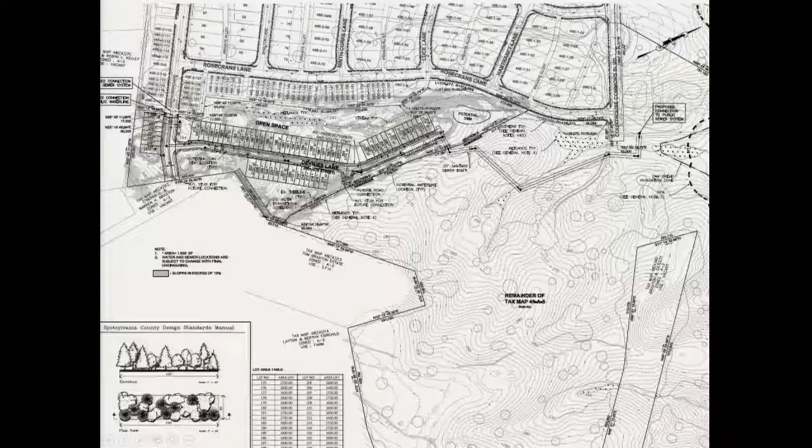There are public and private roads within the development now, but the public road will extend south here, and the private road here will be known as DeVries Lane to serve these 60 single-family attached lots.

The 60-lot subdivision is a result of a rezoning, a mixed-use rezoning that is a multiple-phase development. There's approximately 86 acres which will remain to be developed at a later date, and you will see those preliminary plats in the future as they come across.

These lots will be served by public water and sewer. The preliminary plat has been reviewed and approved by the Technical Review Committee, and staff is recommending approval and asks the Planning Commission to adopt the approval resolution in your packet.

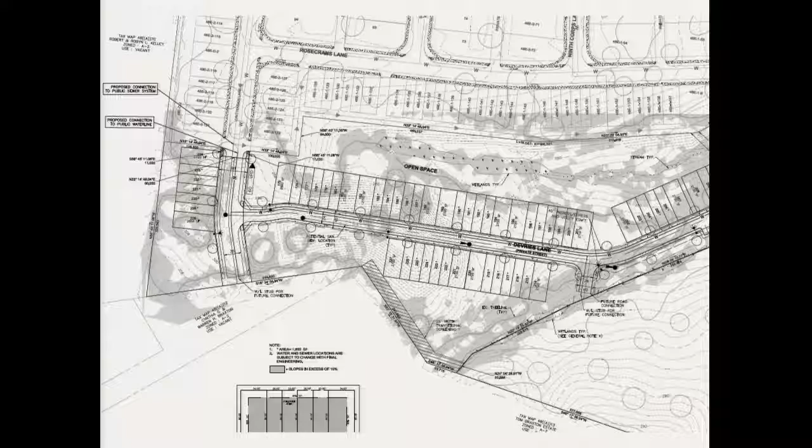Any questions or comments? I'll take a motion to approve. Second. All those in favor say aye. Aye. Opposed? Abstentions? Abstain. Very well. Moving on to the next item, public hearing, rezoning R17-0012.

This is a request to rezone approximately 6.5 acres from residential 1 to residential 8 with proffers to allow for 45 age-restricted single-family attached units to be known as the Villas at Salem Church. The property is located at 5715 Ross Drive and lies on the north side of Ross Drive, about 500 feet east of Salem Church Road. The by-right development potential with the current zoning for this property is 4 single-family detached lots. Staff is recommending approval of the request with the proffers submitted by the applicant.

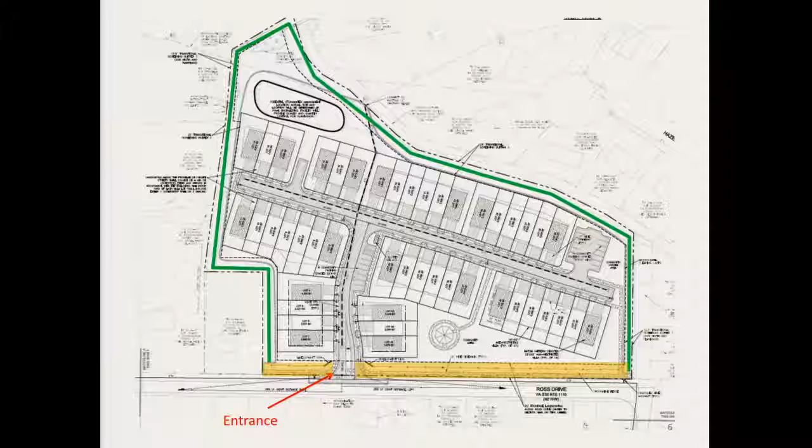Continue, please, Kim. The applicant provided a fiscal impact analysis which asserts that the Villas at Salem Church will have an average sales price of $250,000 and generate revenue to the county in the amount of $121,730 annually at build-out.

Staff conducted a separate analysis using the county's model. We used an assumed assessed value of $226,250, based on the River Crossing Villas at River Road and Bragg Road next to Spring Arbor Memory Care, a comparable product in the county. Utilizing their average assessed value, our model projected that the project would generate $65,540 annually at build-out.

It's not uncommon for these numbers to be different. Our model is admittedly a conservative model, but I think it's important to note that they're both trending positively.

The applicant has provided proffers for the Planning Commission's consideration. The first being development in conformance with the generalized development plan that we just reviewed. This is an on-site proffer and consistent with the state code.

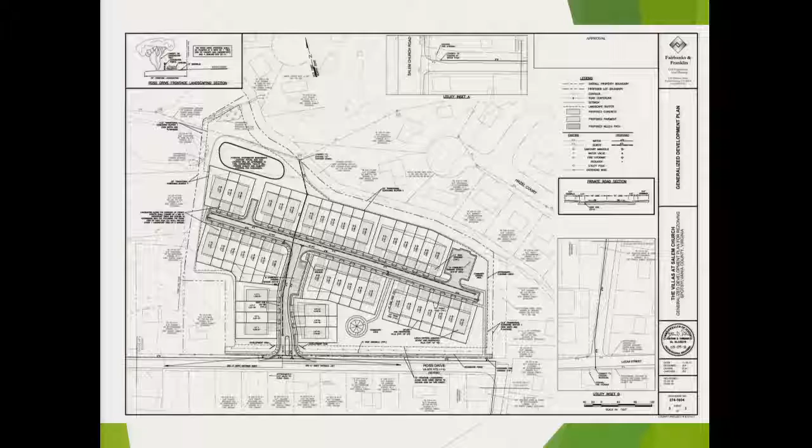The next slide is a little easier to see and shows what I was just talking about. To the north, there's a tree line area. That hatched line running north behind our project is an easement area that's been undisturbed for many years; we're not disturbing that. You'll see we're also providing a 25-foot wide transitional buffer and replanting that area, as well as a transitional buffer around the property to the south, east, and north.

You'll see open community areas to the south, with a little gazebo and other features, and additional community areas to the northeast. The sidewalks will all be connected, creating walking opportunities for residents. This is intended to be somewhat of a private residential community for those who will eventually live there.

For purposes of access, at the community meeting there was concern about traffic coming directly out and impacting the property to our immediate south. So we created this island that extends into the project, much of which will be landscaped up front. There's also a little jog that pushes vehicles to the west, which pushes the impact of vehicles leaving at night away from the immediate south, so that homes to the south would not be impacted.

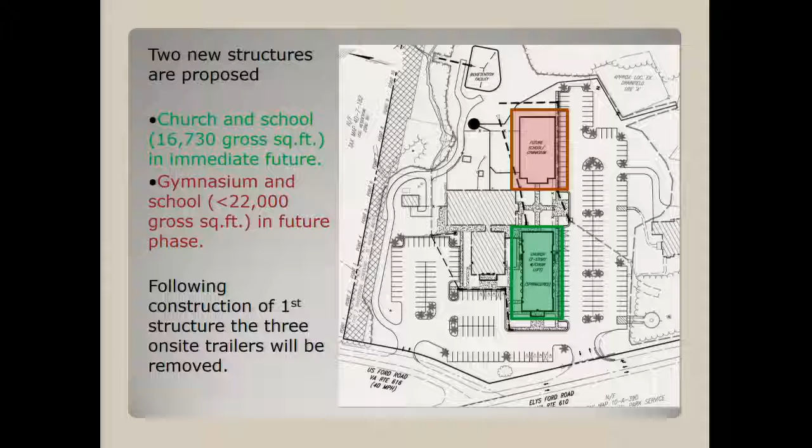Access to the property is provided by both Ely's Ford Road and US Ford Road. Ely's Ford Road is estimated to move approximately 5,000 vehicles a day, and US Ford Road approximately 800. Trip generation data estimates 460 and 153 vehicles per day expected on Sundays at the Ely's Ford and US Ford entrances respectively. During the weekday, the private school is estimated to generate approximately 420 and 140 vehicles per day onto the same roadways, respectively.

Additional parking is also proposed on this GDP, which will be required as the property develops. The applicant is also proposing a new dry pond, labeled a bioretention facility, which is necessary to treat water runoff resulting from these new impervious areas.

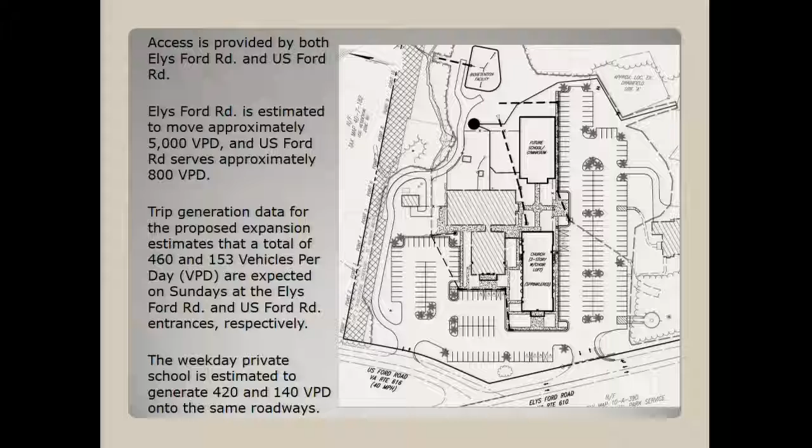Patrick. Yes, sir. Dry pond — could you explain that? Explain that again. Sure.

Water is routed to the bioretention facility, the dry pond. There's wet ponds and dry ponds. The dry ponds are not expected to take on as much water as the wet ones. This particular pond, as I spoke with the applicant about previously, should not have any more than a foot or two of water in it, and is supposed to drain out in about 2 days. If I'm incorrect about anything, please correct me in the presentation. Thank you. Thank you.

The applicant is proposing a transitional screen 2 along the north and eastern property lines. That was originally proposed to be a transitional screen 1. We'll touch on that more in a minute. The code requires a transitional screen 1 when a place of worship abuts a single-family residence, so what they're proposing now is above that.

The buffer along the eastern property line, shown in beige, is proposed to be basically a 35-foot tree preservation area, for lack of a better term. At present, no additional plantings are proposed there, but 35 feet will be preserved as it is today. The buffer shown in blue outline will be enhanced with additional plantings, at a minimum 35 large evergreens, 70 medium evergreens, and 8 large deciduous trees.

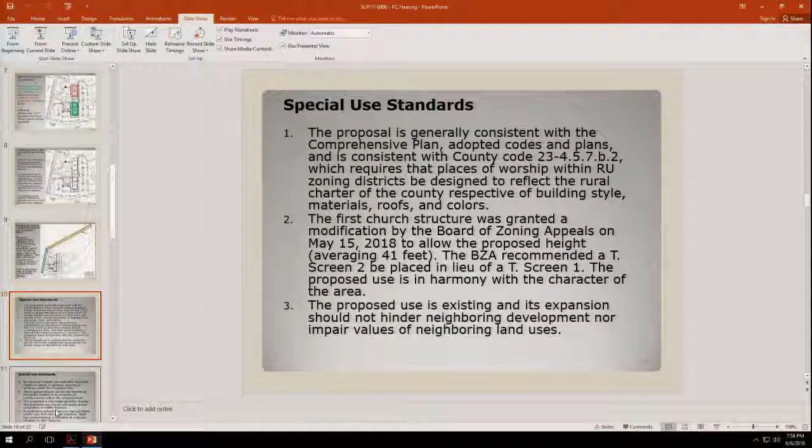There are 8 standards of review analyzed in a special use application. They're detailed in your report, but I'll briefly summarize them. First, the proposal is in general compliance with the comprehensive plan and other plans and codes. The proposal is generally consistent with surrounding uses, coverage, density, and character, although, as mentioned, there was that modification for the height. The proposed use is existing, and its expansion should not hinder neighboring development nor property values.

No adverse impacts are expected regarding health or safety. The proposal should not be detrimental to the public welfare or that of neighboring properties. The proposed use has adequate access to facilities, but requires well and septic facilities due to the lack of available county water and sewer services. It's outside of the PDB.

No traffic hazards nor congestion are expected from the proposal. Lastly, the property does contain earthworks in the form of cannon emplacements and trench lines. It's believed to be the site of quote-unquote Hooker's Last Line. Staff is recommending a condition to prohibit disturbance within this culturally significant area.

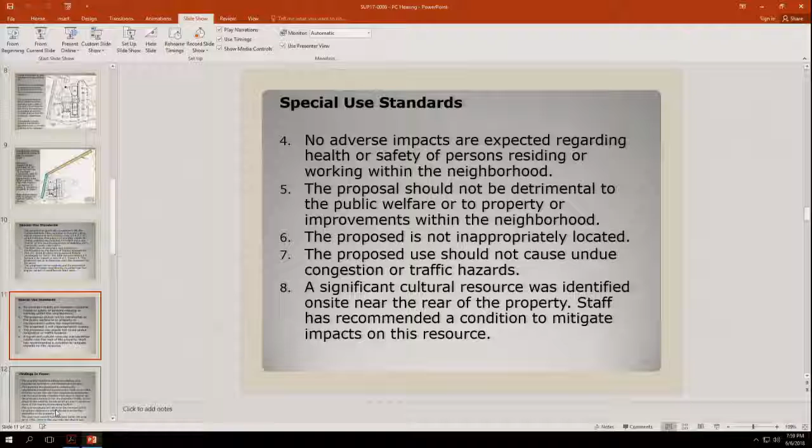Explain that to me, Patrick. Sure, do you have a condition that explains that? That's you'll get to? Correct. Okay, I'll wait for it. All right, Mr. Chairman. Yes, sir.

One question, Patrick. On the height, the 6 foot, that is because of the grade of the property, am I correct? That's right. The front grade of the property is substantially higher than the rear grade. Because we define height using this averaging, it exceeded the maximum height. Thank you.

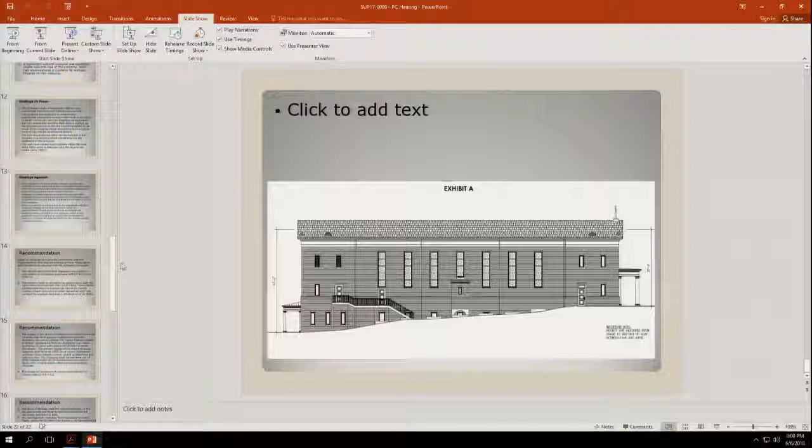Picking back up on the presentation, there are only a few slides left — summary slides and then the final slide. Staff reviewed the case and found the following in favor.

The church has been located on the property since the early 1980s. In 1993, it was expanded to provide private schooling and has since grown with relative harmony in relation to its neighbors. Its expansion will allow new members of the church and provide a better learning environment for the students by relocating them from portable classrooms into permanent space.

The applicant has snugged the access path closer to the south in order to provide the widest buffer area they can on the north buffer, and has proposed to place additional trees in the northern buffer to better screen the land use.

These were the findings against. The applicant's proposal currently includes the development of drain fields in a culturally significant area. Staff's recommended condition is to prohibit this. Secondly, we observed a level of service reduction expected from a B to a C during weekday peak hours on Ely's Ford Road.

It's worth noting that the comprehensive plan recommends that roads like this have a level of service C, so it's still in compliance with that.

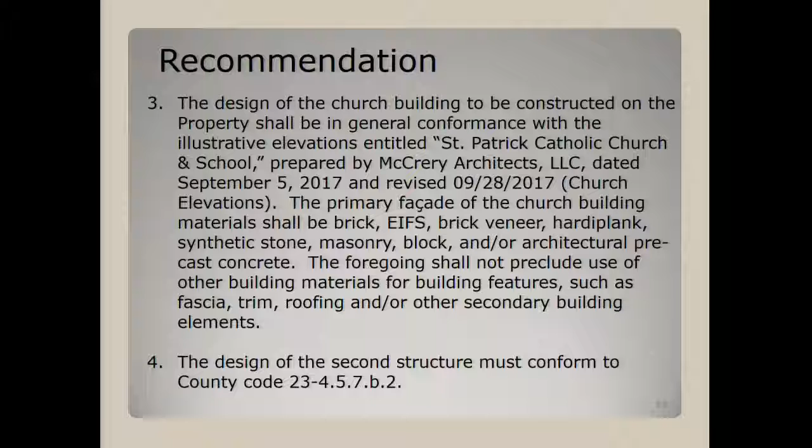Secondly, the property will develop in conformance with the GDP as presented tonight. Thirdly, the design of the first structure will be in accordance with the design elevations in your packet. Also, when the design is complete for the second structure, it still must conform with the county code referenced there, which governs the development of churches in the rural zoning district, intended to make them look like they belong in a rural Spotsylvania setting. It has some material specifications and some color specifications.

The fifth condition, excuse me, this one was worked out with the applicant, that the place of worship will not exceed 608 seats or the occupancy limit set by the fire marshal. Sixth, that the development, including construction of septic fields within the identified boundary of site 44 SP 0638, is prohibited. And seventh, that no temporary parking of vehicles shall occur on Ely's Ford or US Ford Road — it's only a 2-lane road.

With that, I'll stand by for your questions. I know the applicant has a presentation, and thank you for your attention. Well, apologies for the interruptions, Patrick. Any other questions? Mr. Chairman, did you have a slide, Patrick, that showed the existing drain fields that are being used and the reserve drain fields and how they relate property-wise that we can take a look at?

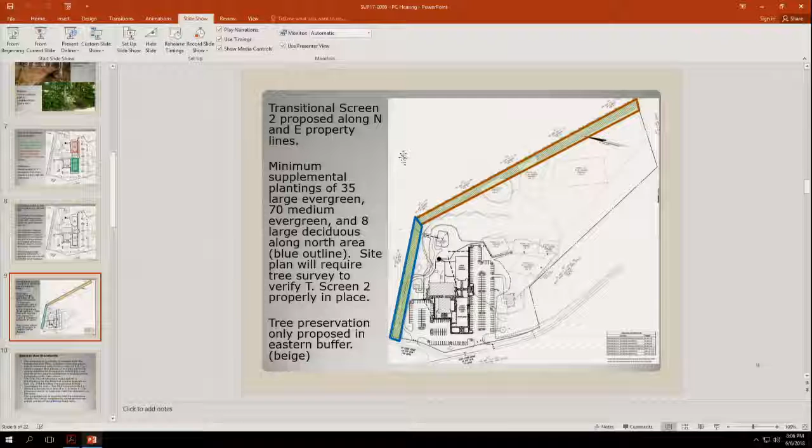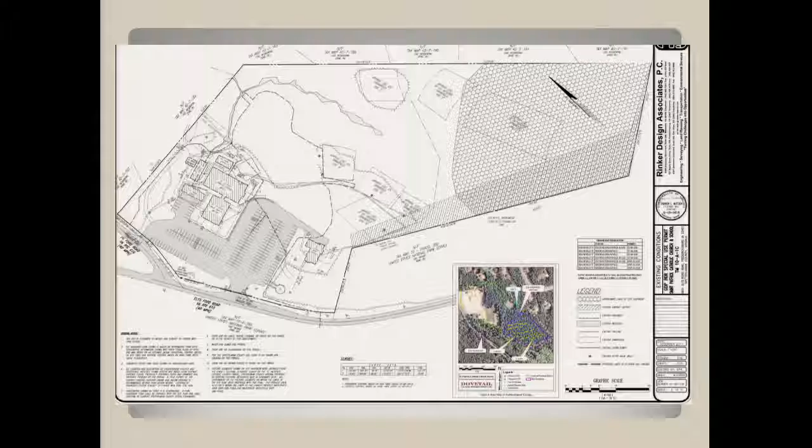This image depicts them fairly well. There is a located drain field that my mouse is on now, called A. There is a B right here. There is a C here and a D here, an E up here, an F, and drain field G, which is the largest.

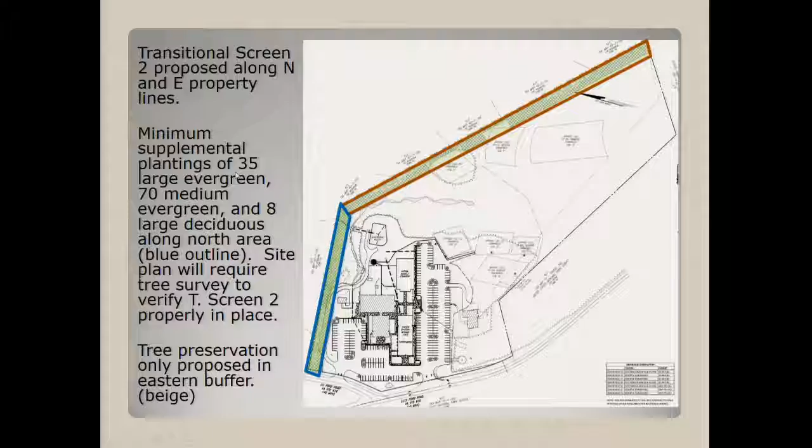And do you know which ones are the primary drain fields and which ones are reserve? I do have that data on the GDP, I'm just going to have to look for it. Or is that in your presentation? Okay. If you can't find it, that's all right. No, I can find it.

Drain field A is existing. Drain field B is reserved. Let me get those in front of you again real fast.

A is an existing drain field in use. B is a reserve drain field, this one. C is a reserve drain field, this one. D is an existing drain field in use, this one. E is an existing drain field in use. F and G are reserves.

Along what would be the south boundary line, the other cross hatching is also a restricted area. What is that? I can't read your plan.

On the south end is a small overlay of a historic overlay district boundary. So does that preclude the use of that?

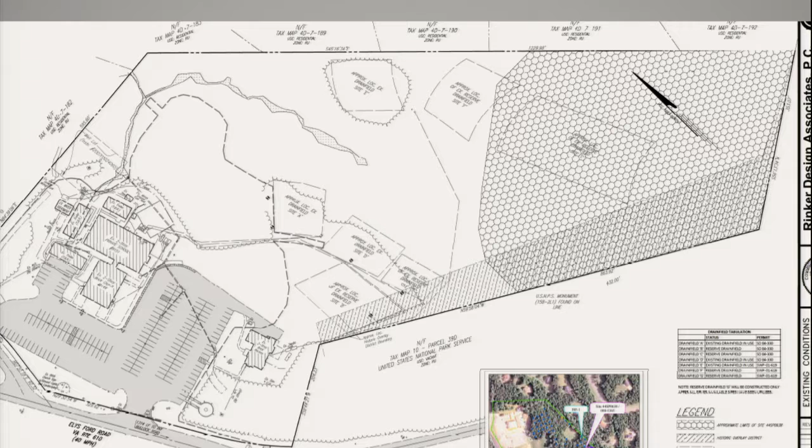So what you're suggesting is drain field G? It's most impacting drain field G, and drain field F would just need to be cut shy a little. Thank you.

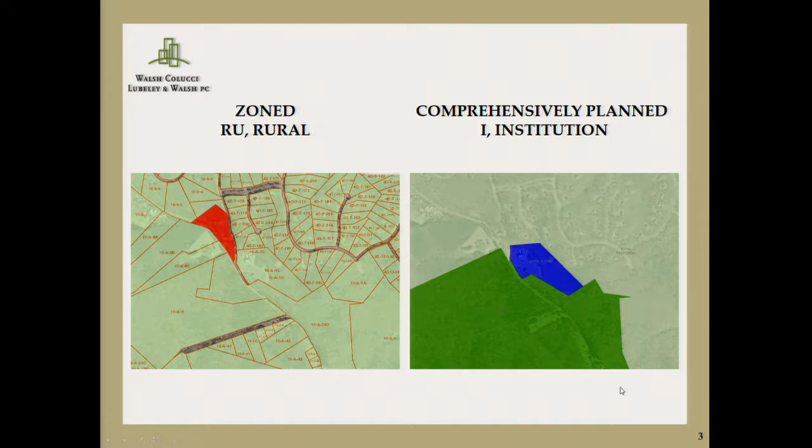The property, as Patrick indicated, is located at 9151 Elys Ford Road and is comprised of approximately 17.81 acres. Of that, the applicant is proposing to develop 3.15 acres for impervious area, which is less than 20% of the entire site. The property is zoned RU Rural and comprehensively planned Institutional. The special use permit is required in the RU district and is compatible with the long range land use plan.

This aerial shows the existing layout of the church. Here is the church, here is the school, and here is the existing rectory on site. The existing school serves children ages pre-K 3 through 8th grade. The middle school children are currently, as Patrick indicated, in the trailers located on the site, here, here, and here.

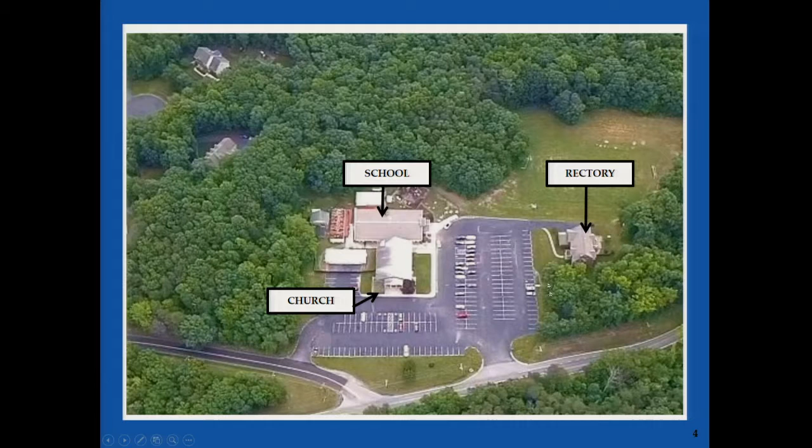This slide is a colored illustrative of the general development plan. The areas in lighter green here and here are existing vegetation that will remain undisturbed, and the areas here are the cleared areas. The slightly darker areas on site, here, here, and here, are existing parking areas and the travelway. The travelway was designed to serve the bioretention facility, the water filtration facility, and there is also a well here.

In addition, the applicant worked with the fire marshal's office to determine the best place for fire access in case of an emergency, to serve behind the existing school, which they don't have today. This area, which I'll also cover on the landscaping slide, is for the fire truck turns and was required per the radius set by the fire marshal's office.

The applicant currently has 7 masses for Saturday evening and Sunday services, and the goal for the expansion is to add additional seats and ultimately decrease the number of services on Sundays. The existing middle school students will then be relocated to the new church building on the ground floor, which will allow the trailers to be removed from the site permanently.

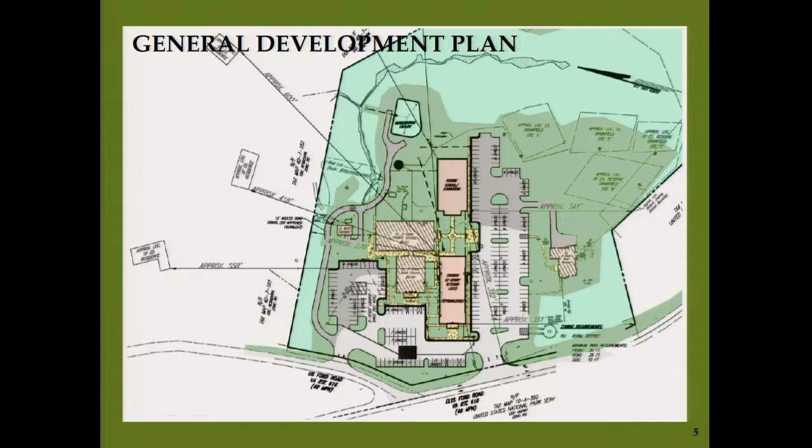This slide is a colored elevation of the landscape plan. Again, the areas here will be undisturbed. The question you had was regarding the variable width buffer. The BZA requested that a 35-foot type 2 buffer be required. The zoning ordinance only requires a 25-foot buffer, but it also allows for a variable width, so in areas where we cannot make 35 feet, it's made up in other areas.

For the most part, it's 35 feet along here. The area where it's not starts approximately here and ends approximately here, and that area was required for the fire truck turn radius. That area is made up along this area here, so in this area, it's more than 35 feet.

That also applied to where the existing drain fields are. So in the areas where there's existing drain fields, or reserve drain fields, there is no intention at this time to clear that area, but if in the future the reserve drain fields are required, there will be additional plantings along this area here and here to make up that 35-foot buffer requirement.

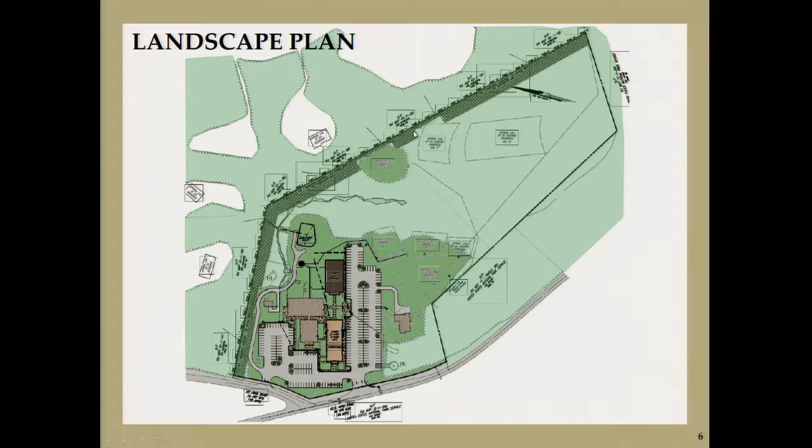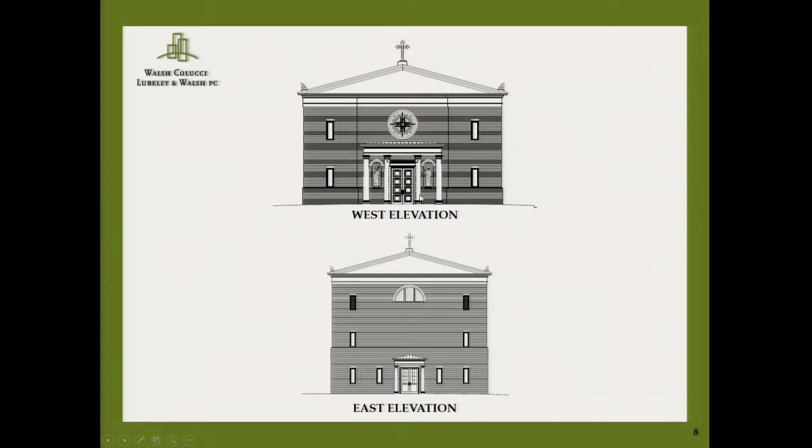As Patrick mentioned, there was a height modification request. Looking at the picture, you can see it's higher towards Ely's Ford Road, and as you go down towards the school there's a significant grade difference of about 12 feet. The zoning ordinance defines height as the average vertical distance between the eaves and the ridge of a gable from the grade. Because of the grade of the site, it's higher towards the front and dips down towards the rear. The rear is actually 47 feet, and when you take the average, we are 41 feet in height, which is 6 feet over the zoning ordinance requirements.

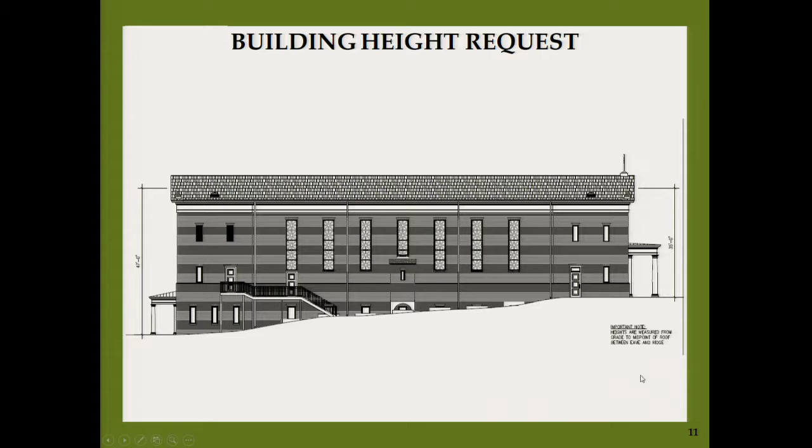The last request: the applicant worked with county staff and agrees on all of the conditions. However, the applicant is requesting that current condition 6 either be eliminated or revised to say that development within the identified site boundary, as depicted in the inserted figure 4 on the GDP, is prohibited. However, this condition shall not prohibit the use of reserved drain field location G. If the use of the reserved drain fields is needed on the property, reserved drain field location G shall be the drain field of last resort.

This is a unique situation because this is an existing school and church, and they have existing permitted drain fields on site. Taking away the use of one of those drain fields, as Commissioner Newhouse mentioned, has a significant impact on the church. If all of the other reserve fields fail, heaven forbid, they're in a situation where they either can't expand or the cost to remedy and add a new drain field is significant. So at that request, we would ask that the applicant be able to have reserve drain field G.

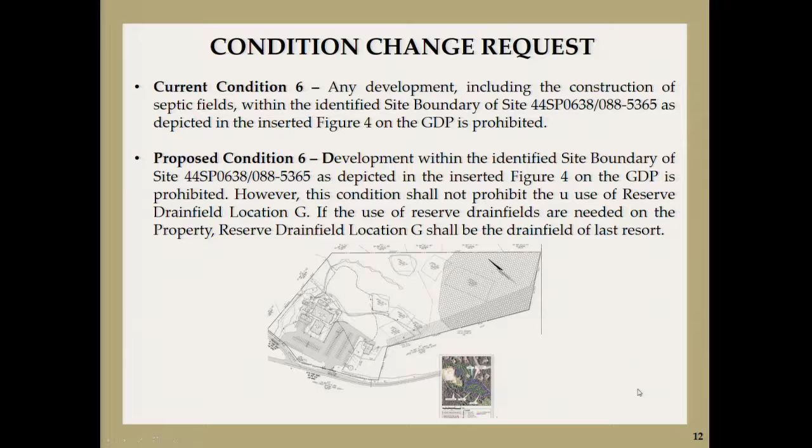That concludes my presentation. I know you give people time to speak, but if I can save some time, I'll just ask that everybody here from the church and in support stand, which could cut down on repetitive comments, if that's okay with you.

That's fine with me, yeah. If everybody from St. Patrick's that's in support, can you please stand?

All right, thank you. Any questions or comments for the applicant?

In terms of the trailers, I want to be clear, when do those get removed? Is that in this first phase? The trailers will be removed in phase 1, once they can get the occupancy permit for the building and the middle school children can be in the basement. As soon as they're able to get the children into the first building, they will do that and the trailers will be removed. Do you have any other trailers on site that are non-classroom? They're all classrooms. Temporary classrooms. Okay, very good.

I don't have any more questions for you at this point. Any other questions? I will open the public hearing to the audience.

Again, same rules apply. You'll have 3 minutes, as indicated with the green light on the podium. When it turns yellow, you'll have 1 minute left. In red, I would ask that you wrap it up. When you come to the podium, state your name and voting district, or your address will do just as well. I have Jerry McClure, followed by Maureen McClure.

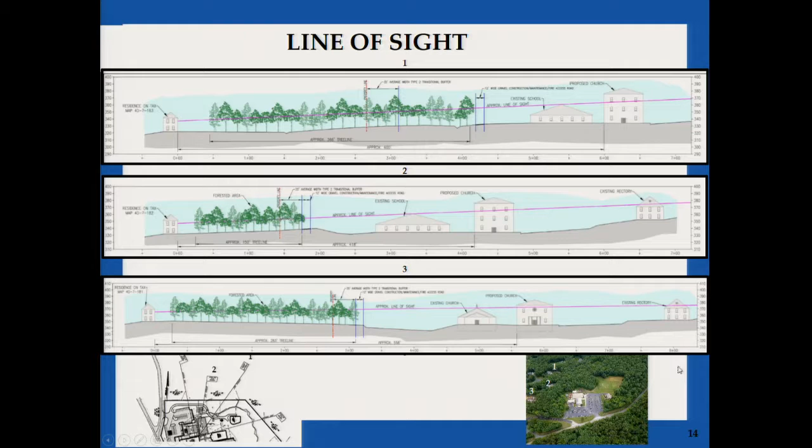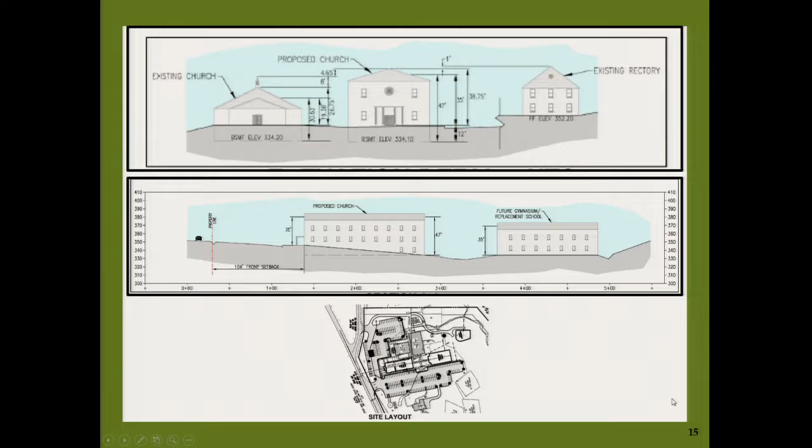McClure had mentioned that in some areas it's about 5 feet away from their property. The proposed service road is being relocated at least 35 feet away from their property, in some instances where it's smaller, 25 feet, to accommodate the fire trucks.

All of this area will be re-landscaped. I've heard a concern about making sure that landscaping is put in place based on previous promises. At the time of site plan, as Patrick mentioned, there will need to be a tree survey of the site to make sure the plantings are required. In addition, the landscaping is bonded, so the church will have to put up money in advance of the site plan to make sure those trees are put in place. So there are mechanisms in place to make sure there is additional landscaping required.

The applicant, with a 35-foot buffer requirement, even in the areas where it's only 25 feet, will still be meeting the plant unit requirements and adding deciduous trees, which is an addition to and a requirement in type 2 buffers that's not required in the type 1 buffer.

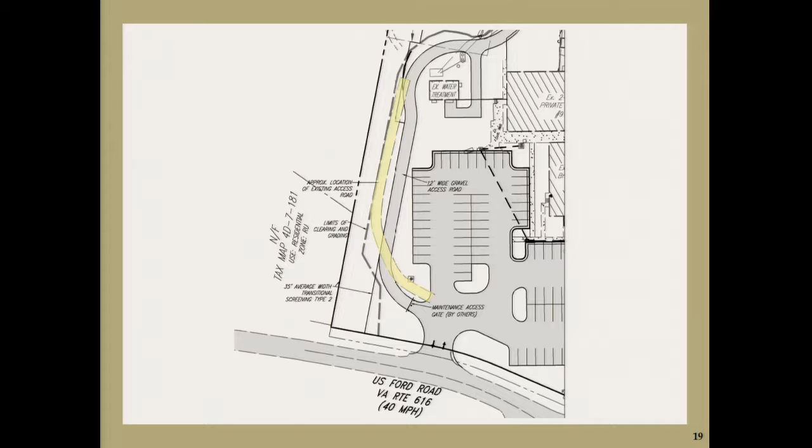I can answer the question about the bioretention facility. That was placed there to catch the maximum amount of water. It is a dry facility, not a pond that has water all year long. There is a concern when you talk about wet ponds of mosquitoes growing, but because this is designed to infiltrate and drain back into the ground within 2 days, that's not enough time for mosquitoes or other bugs to breed. It will also be heavily landscaped, so we think the safety concern has been mitigated by the fact that it's a dry facility.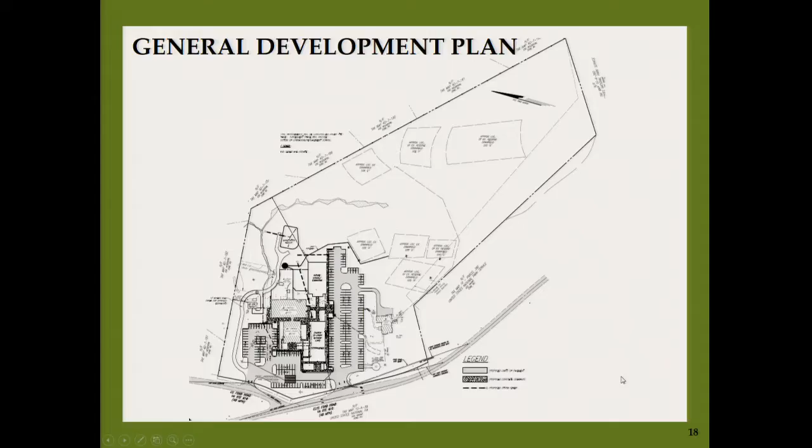In addition, the facility from the Jennings property, his property is here, and from here to here is approximately 300 feet away from his property line. So we think that's enough distance to combat any safety concerns one may have.

If I may. Yes, sir. This pond's going to take sometimes 2 to 3 days to drain. The engineer said it can happen that way. Okay, so you've got 2 days of 2 or 3 feet of water in there, right?

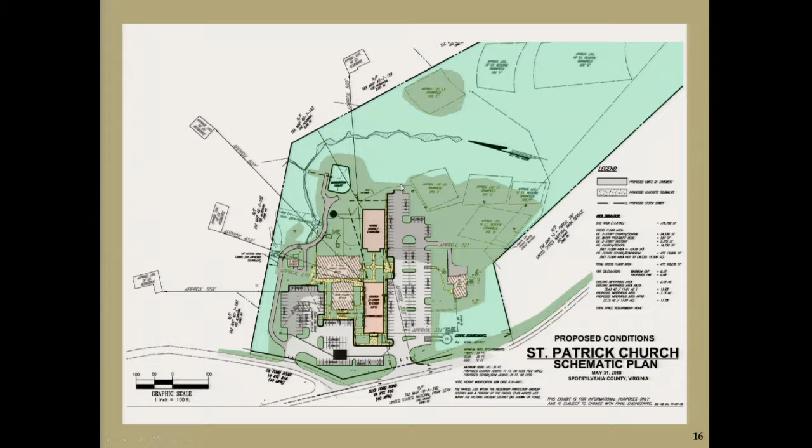Okay. Any other questions or comments? At this point, I'll close the public hearing portion of this.

I'm going to make a motion to approve this special use permit application with the conditions Patrick outlined in the presentation, striking number 6. The alternative for the church, should the worst case scenario happen and they lose the ability to utilize that drain field, would create a far greater problem than respecting the historical nature of that area.

But I would like to recommend another condition, that the church and the neighbors work together to, A, maintain that 35-foot buffer, and then address the safety concerns regarding not only the pond, but vehicular or pedestrian traffic down that access road. So with that, I motion to approve the application with those two changes in the conditions.

Could you give me those two changes again? Number one is striking number 6, which prohibits the use of drain field G. Number two is adding a condition where the applicant and the neighbors work together to address safety concerns, and also to maintain that 35-foot buffer.